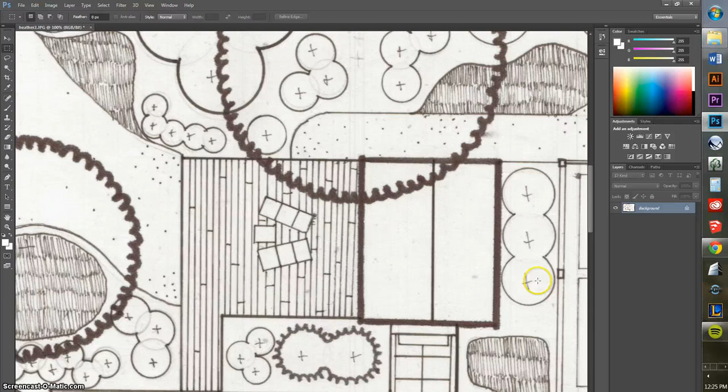And if I zoom in here, you can see that all of this was drawn by hand. And some of the first things that we notice is that the background of the paper is not white. It's actually kind of a creamish gray color. And the black ink work on here is not really black either. It's more of a gray tone. So the first thing we want to do is fix that.

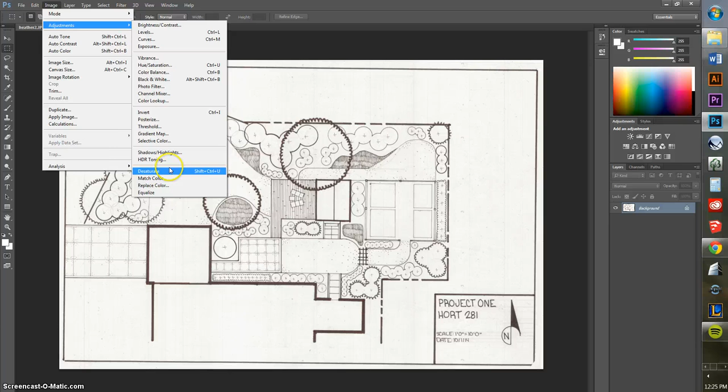Also, you can see that the scanner kind of left some vertical lines on here that we also want to get rid of. So I'm going to go ahead and get started. The first thing I'm going to do is I'm going to go under Image Adjustments, and I'm going to desaturate. And all that does is it actually gets rid of all the different hues so that you're left with a pure grayscale image. So all you have is white, gray, and black pixels.

Now that that's done, I can go under Image Adjustments and adjust the levels. And levels basically control the output of black and white in your image. So if I just drag the slider to the right, you can see that my darks get darker. And if I drag the slider to the left, my whites get whiter. Also, if I drag the slider in the middle, basically my midtones get either darker or lighter. I'm going to go ahead and leave that at 1 at the very middle.

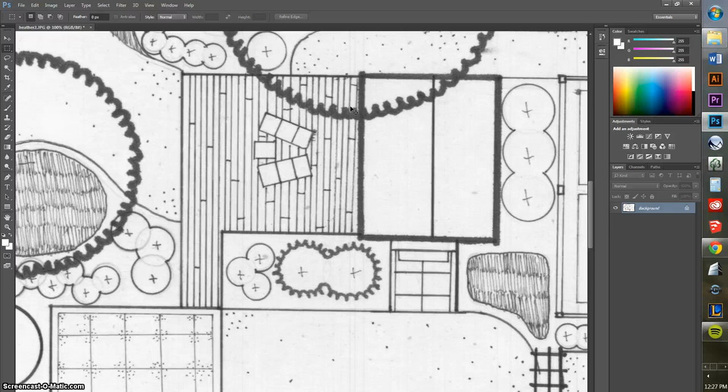And the first thing I'm going to work on is my black and white. So I'm going to zoom in here so we can see the effects a little bit more. Okay, so again, Image Adjustments, Levels. And I just want to make sure that that background is white first. So I'm just going to slide this over. And basically you can do it just by eye so that you don't lose too many details. I want to make sure that I don't white it all out.

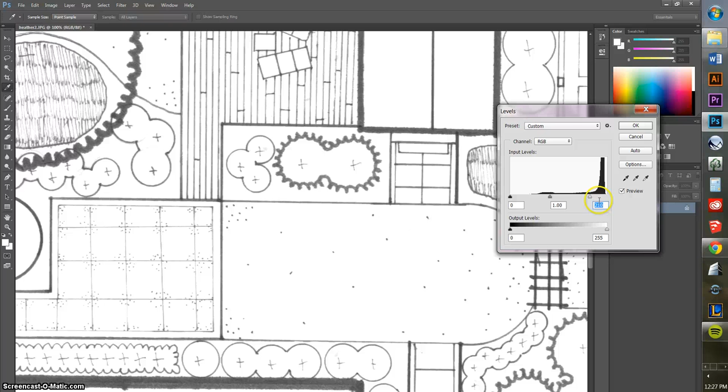I still want to be able to see the nice stippling detail on here. I just want to be able to get rid of those vertical lines from the scanner from before. So now I'm going to slide this one over to make the blacks darker. You can see how that's starting to pop really nicely.

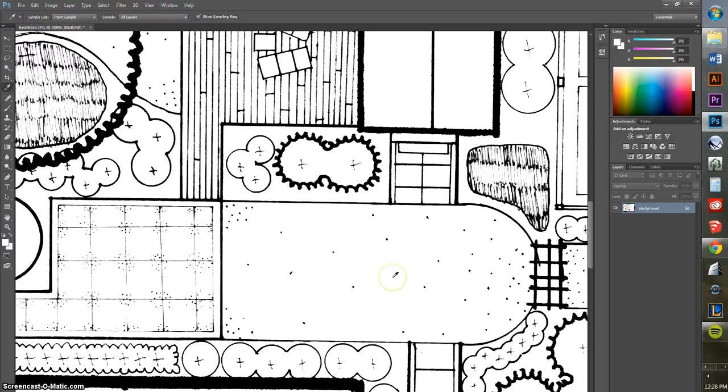And another good way to check whether your background is perfectly white, I'm going to hit OK, is if you use the eyedropper tool. You can just eyedropper in the white space. And you can see here that the value for that is 255 on all red, green, and blue channels, and that means that that is actually a perfect white. I'm just gonna double check all my different areas and make sure I haven't lost any detail that I want. And that actually looks pretty good to me.

I also noticed that when this drawing was being done by hand, there's a piece of tape here, and the corner border of the title block didn't get drawn in. I'm going to go ahead and fix that right now. And the way I'm going to do that is I'm going to use the stamp tool, which is this one right here. So first I'm going to limit the area of activity to just this area right here with the selection. So that means that any of the work that I do won't go outside of that area.

And then with the stamp tool selected, it starts giving me a preview of what it's going to do. And basically what the stamp tool does is it copies pixels from another area in your drawing. So if you hold the Alt key, it'll sample a pixel location. So I click once, release the Alt key, and you can see now that I have that pixel area. It's going to start drawing that wherever I put my cursor down.

So I'm just going to line it up right here and just slide that down. And what that's doing for me is just redrawing that same line that's over here. And again, holding the Alt key, I'm going to sample the side, release, and do that for this corner. And actually, I might want to reduce my brush size a little bit, so that we can get into a little bit more detail over here.

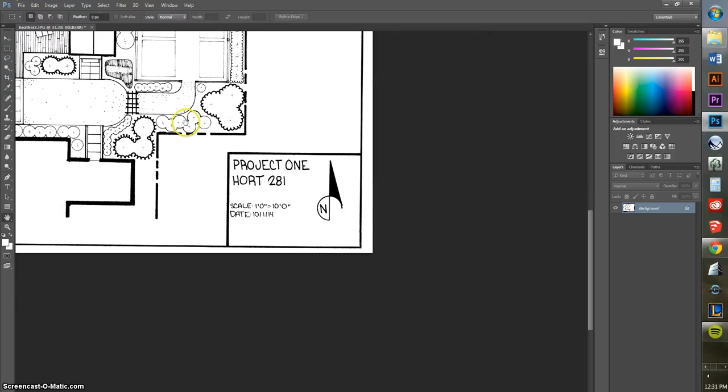And now we have a drawing that's ready to be imported into Adobe Illustrator.